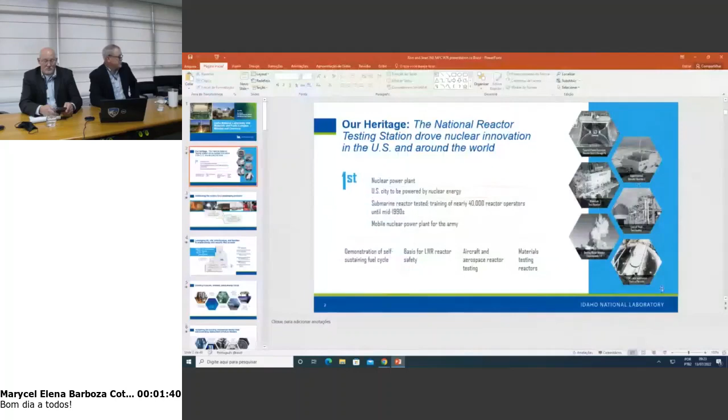Let's see if this works. Yes. All right, excellent, thank you.

Good morning, and thank you very much for having us. As the introduction, my name is Ron Cron, and this is Sean O'Kelly.

We work at the Idaho National Lab, which is the United States National Nuclear Lab. Idaho National Lab is in the Pacific Northwest region of our country, and our facilities are out in the desert. The history of the facility is that we have built 52 nuclear reactors for demonstration.

We are an applied engineering lab, so not as much theory and more actually building, construction, engineering, and experiments.

The first nuclear power plant in the world was built at the Idaho National Lab, and it powered a small town just west of our site called Arco.

It was also the home of our naval reactors training facilities and prototype reactors for many, many years.

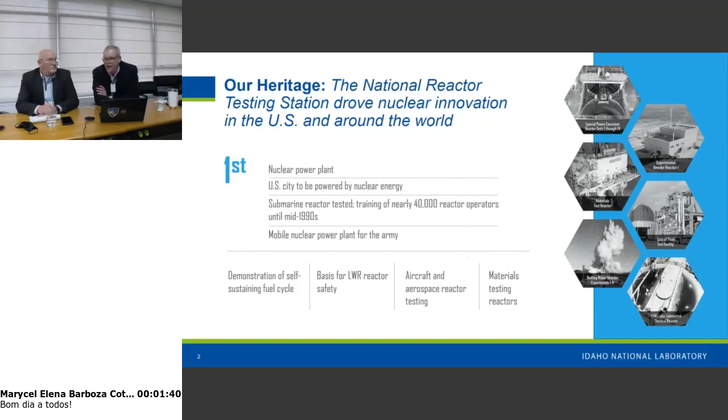Since that time, we've evolved - let me see if I can coordinate this - our mission has gone beyond nuclear, and it's more about energy delivery.

Obviously, the world is facing all types of energy and climate challenges, that nexus. We believe our lab is positioned to solve those types of problems in a leading way. Our mission is to discover, demonstrate, and secure innovative nuclear energy solutions.

So it's not just about providing the energy, but also showing how you can use nuclear energy in a different way than just hooking it up to the grid, and providing the cybersecurity such that it cannot be hacked.

All right, you jump in anytime you want. Our site is very large. You're not changing that one. Oops, thank you. I am changing this one - I'm just going the wrong direction.

Okay, let's see if we can coordinate this. We're gonna do this. We have the team up here. So our site, it's hard for me to hold still when I'm presenting. I'm usually standing, moving all around.

Our site is 890 square miles. So it provides an opportunity when you have a site that large, with 5,300 employees and 600-some vehicles in our fleet, where we can really demonstrate in a fundamental way how you may be able to do energy delivery at scale without ever leaving the boundary of the government complex.

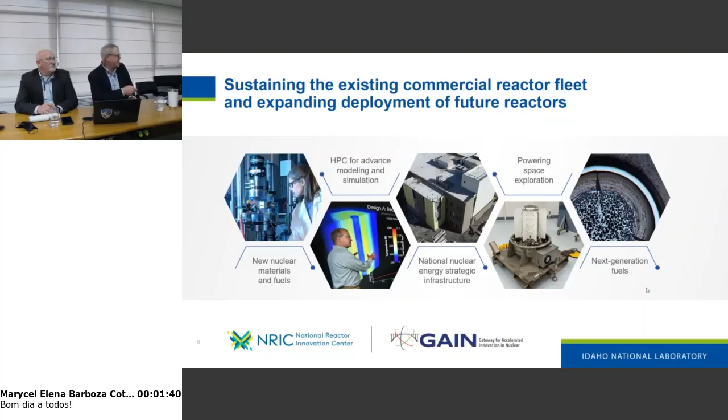And we have an idea of building new advanced test reactors. We are currently working on 3 reactors at my site right now, what we call micro reactors, 10 megawatts or less. We believe the future still includes large power plants, the 1,000 megawatt version. We also believe small modular reactors will help the United States replace the coal plants that are being retired. And we believe these micro reactors will serve places that are off the grid — our Department of Defense likes the idea of having a reactor they can transport and not have to deal with diesel generators and diesel fuel in combat situations.

So on this list, you're going to see this Marvel reactor, which we're building in our transient reactor test facility, looking at a 2024 completion date. Project Pele is the one for the Department of Defense, and as you can see, they want a reactor that can be transportable.

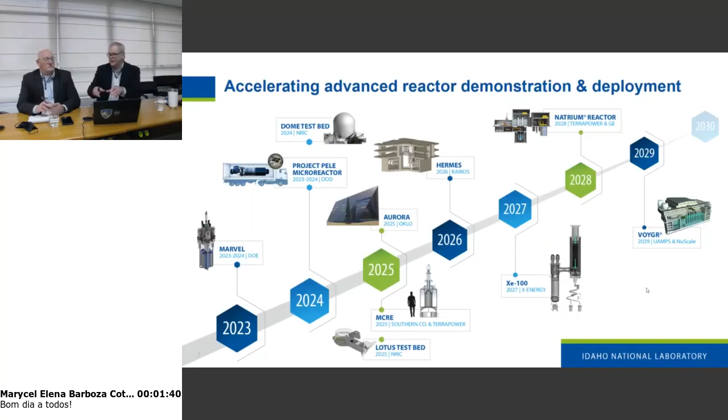Our lab director came up with this slide about 3 years ago when he wanted to challenge the country to start viewing nuclear as an absolute key option. Since that time, I believe the U.S. views nuclear energy as a key part of being able to reduce our carbon emissions. So there's a lot of interest, a lot of political support, and a lot of what we call venture capital, where people are investing in these startup companies. So our job as a government installation is to make it available so they can come out and test their reactors, ultimately to be able to commercialize those reactors and sell them on the U.S. market and the world market.

And then the last thing before I get on to my MFC slides is we want to go net zero, because we want to demonstrate it's possible to take a large landmass that's got a complicated mix of people, vehicles, buildings, and show that with nuclear and wind and solar, you can put this all together and it works on the grid.

You know, I started my career in the power industry, and managing the grid in 1986 was very easy. You had a lot of baseload plants. Gas was used for topping, for meeting demand in the mornings and the afternoons. The power factor on the grid didn't change much at all - maybe we might adjust it once an hour. And now when you have wind and solar, you're adjusting it multiple times a second. So it's just a different dynamic than it used to be.

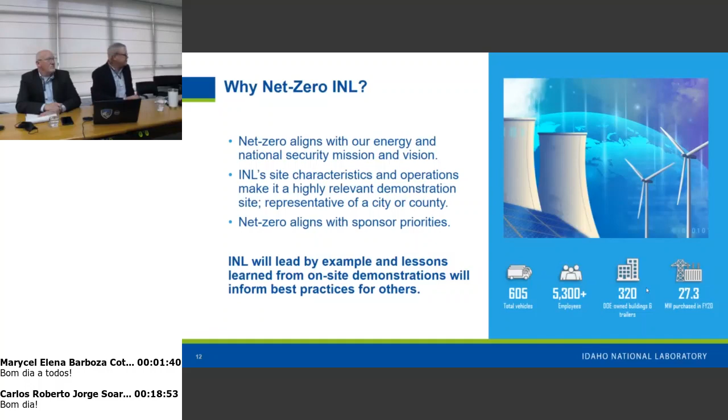Relative to the workforce of the future, this is one of the reasons we're here. This collaboration matters because we view ourselves as a national lab in the United States, but we also believe there's an international problem to be solved here. So having this collaborative agreement makes sense not just for you, but for all of us also. We want to recruit the best and brightest out of the world. So if we find a young postdoc here in Brazil and he seems eager and he thinks he can handle the cold in Idaho, then we welcome him.

So we've grown significant amounts since FY15, over about 1,800 new employees, and we certainly are recruiting all over the world now. So our facilities are world-class. Now we're recruiting, we're getting more and more people interested.

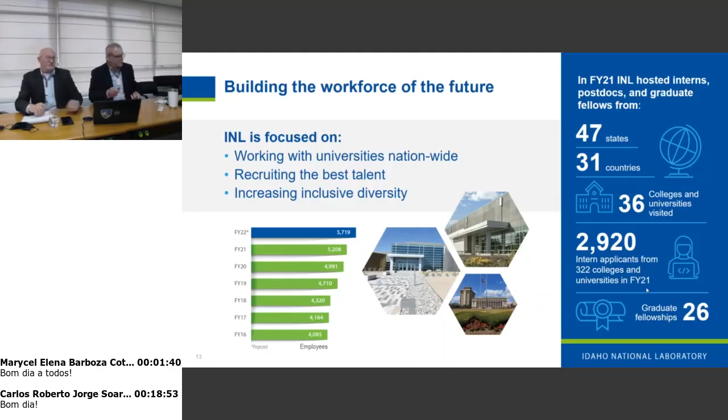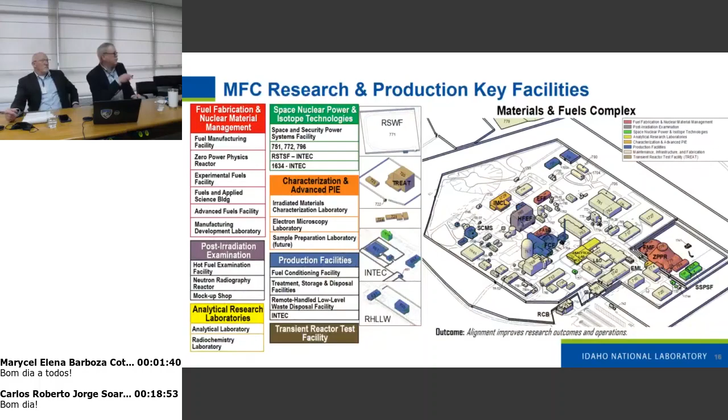These are the key facilities, pictures of the inside of all those facilities, and I won't spend too much time walking through, but basically we have state-of-the-art analytical laboratory radiochemistry capabilities.

We have multiple built facilities that can build fuel. We have a lot of nuclear materials that allow us to, if you come in and want oxide fuels or metallic fuels or silicide, whatever types of fuels you can think of, we are not trying to become a fuel manufacturer, but we do the original demo, what I call the original recipe, and then we show that the recipe can be repeated in the right quality, and then transfer that to the private industry for them to be able to make their fuels.

In our meetings here, I definitely believe there's some collaboration we can do on nuclear fuels moving forward.

This is the sample preparation lab, which is a bad name. It's really going to be a materials characterization laboratory. It is the $150 million brand new build that we're doing that has both hot cells and glove boxes and the ability to directly receive nuclear materials into this facility.

So there's a truck airlock that goes right next to the hot cells, so I'll be able to bring materials in. We're going to keep the IMCL for alpha contaminated fuels, and this will be more traditional materials testing.

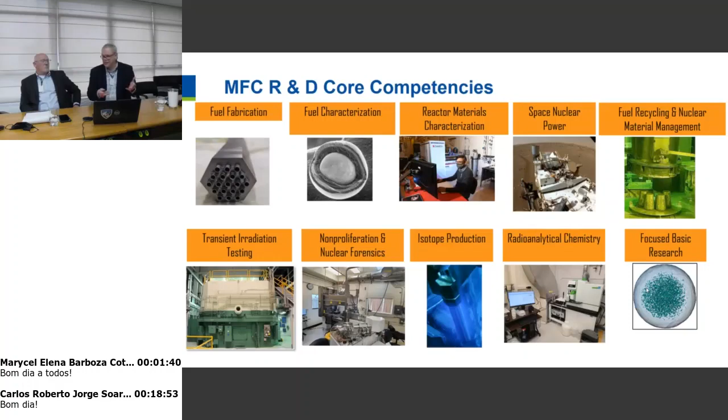These are some of our critical outcomes for next year. We want to deploy reactors. We want to continue to fabricate fuels, do our irradiation testing, and continue to support our NASA customer.

And then we have a big role at MFC in dealing with our back-end legacy items from previous work, making sure that for every reactor we look at, we're taking an approach of wanting to help the reactor builders from the time they want to pick their materials to the time they want to dispose of their waste. That's a pretty large portion of what we do.

It's not my favorite part, but it's in my organization, so I'm kind of stuck with it. But it is important that when you build advanced reactors, you have a plan for the disposition of the waste, because that affects the cost.

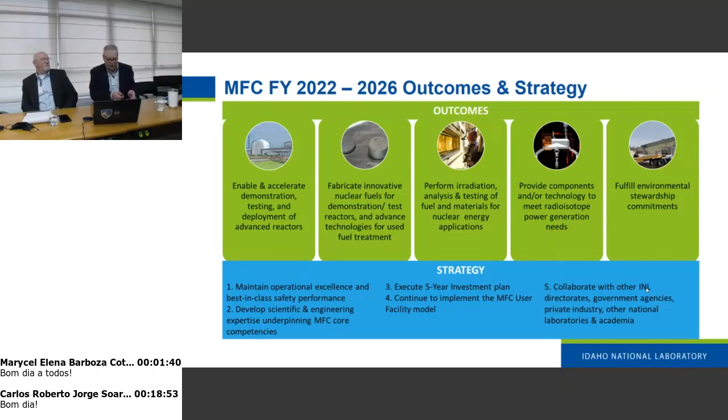MFC has about 900 people on site. We have 29 different nuclear and rad facilities and 2 reactors. And we're completely connected into all the things that the ATR is doing on irradiation and nuclear science and technology.

So the modeling and experimental connection - I generally have a rule of thumb: if we're doing an experiment, we should be modeling it; if we're doing modeling, we should be doing experiments. Those two things are incredibly important for us in the long term, because we'd like to get to the point where some of our models are so sophisticated that your licensing process can be really enabled by modeling.

But as we spoke yesterday, nothing beats an experiment that makes your model look terrible - and that's a good thing. So our models are very, very precise, but sometimes they're very inaccurate. What we're trying to do is make sure everything we're running in the model is backed up by true experimental data.

We are doing some additive manufacturing to make fuels, which is exciting, because I think we can get geometries and layer burnable poisons in the fuels. We can do things that you just cannot do with traditional methods, but there's a lot of development work to be done there. Uranium likes to catch fire when you put it in a powder form and try to put it in a traditional 3D printer. So we're trying to bring our expertise relative to handling uranium, and we've made a lot of progress there.

We are proposing to our United States government to build a new reactor fuels research laboratory. I wish I'd have proposed that 5 years ago, because I need it now. My fuel capability is maxed out. Every corner of floor space is pretty much spoken for.

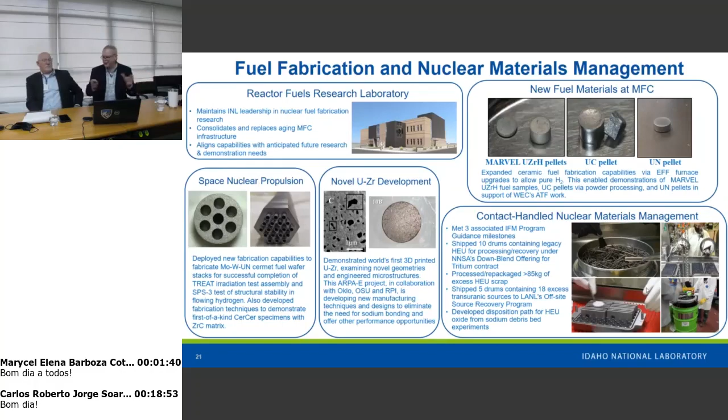Transient testing, again, this reactor is a 1957 reactor. It had not operated since 1994. The reactor was in very, very good condition. We did a restart effort and started it in 2018, and it is booked solid. This reactor allows you to go up to 17 gigawatts in a very short amount of time, and we fail fuel in it. That's the purpose of this reactor, to see how fuel is going to handle during extreme conditions. And that, we believe, is proving to be a big part of qualifying fuels for these advanced reactors.

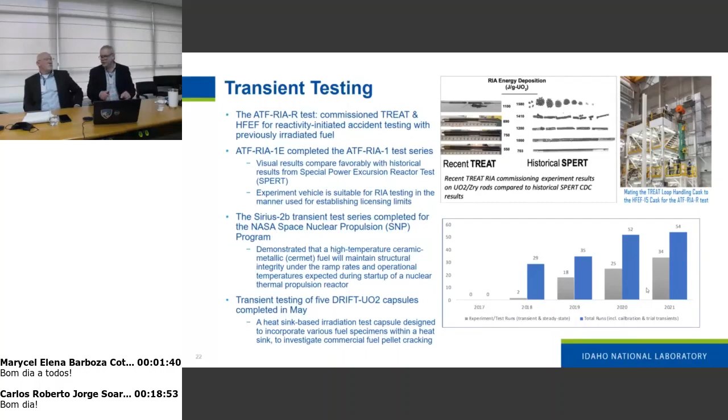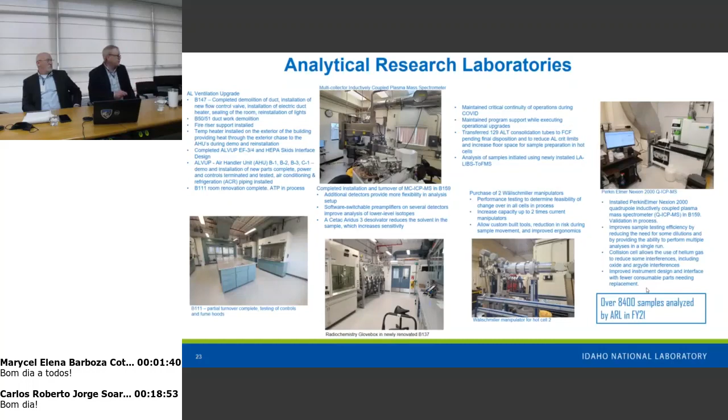The characterization and advanced PIE, we're now getting to the atomic scale and looking at some of the phenomena that, for many, many years, people knew we got these macro effects. When you did PIE, you knew we were having problems, but now we're starting to understand why, and we're learning things that, quite frankly, aren't modeled correctly. And so it informs our decisions on how to design advanced fuels, and it also breaks some old paradigms that we all thought we understood pretty clearly.

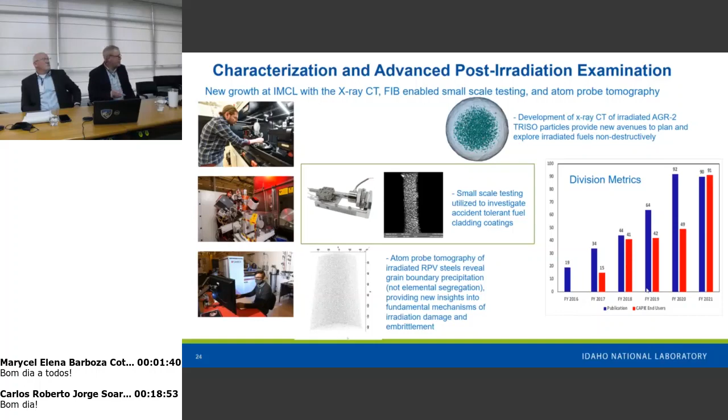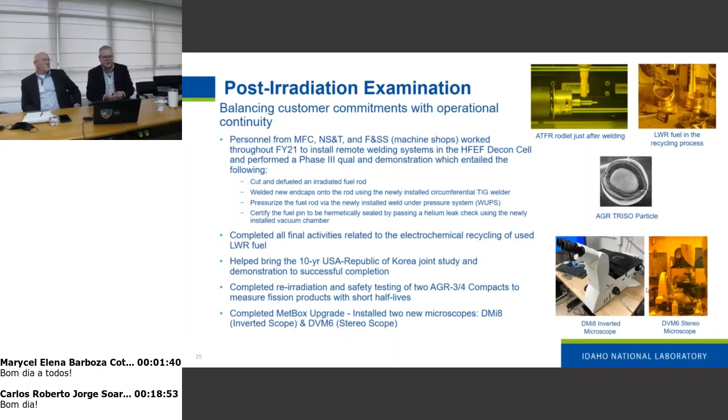Again, post-irradiation examination, HFEF is one of the biggest and most mature facilities in the world, and that allows us the opportunity to try different things. We're now to the point where we've taken some irradiated fuel, recycled it, reprocessed it, put it back into Sean's reactor, and then redone the PIE. We're seeing what's the difference between starting at ground zero with something that was unirradiated and starting with something that you're recovering the materials from, and we are seeing differences there too.

The NASA work is fun. Unfortunately, due to COVID, I was supposed to be there for the last launch, but the amount of people allowed on site kept shrinking and shrinking, and it was just a small group of people there to watch the last Mars launch, which happened in 2020.

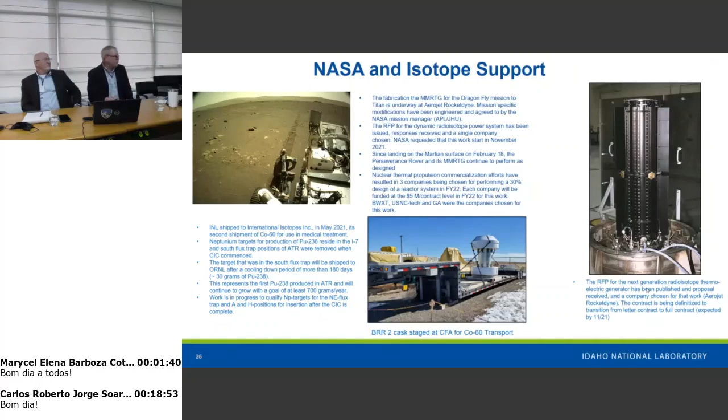And then we are making a lot of investment at MFC. In the last 7 years, with our capital construction projects, we've probably invested about $200 million at MFC. After we finish SPL, we move on to the test beds, and we have plans to invest about 500 million more over the next 5 years. So it's a very ambitious build out, but again, the U.S. sees nuclear as very important.

And this is the material management. We have built a repository out near Sean's facility, just upwind of Sean. We built a place for some of our remote handled low-level waste. And then we are doing R&D in this area to figure out how to reduce the cost of handling some of these materials. And that's, I think there's probably... I don't see it up here.

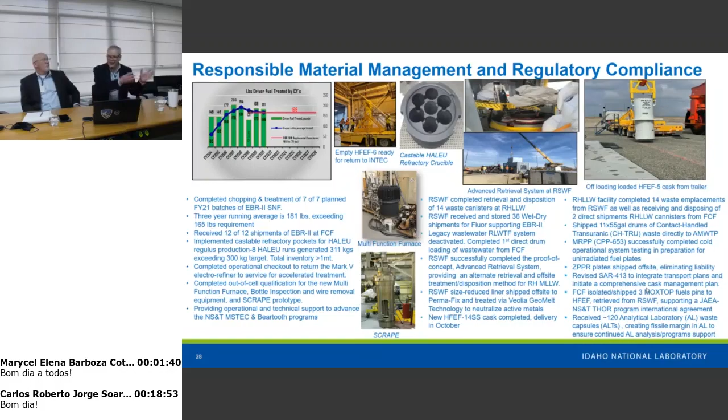Maybe that got edited out. I'm not sure what I can share, but we've had a couple innovative things that are really helping us move away from the traditional break it down, package it, bury it in the ground approach.

Obviously with a facility complex this large, being able to do maintenance, maintain that infrastructure, and fabricate things for these advanced reactors is important. This is a mock-up of the Marvel reactor. We're going to run this with an electric heater before we actually build the final product, which will have the nuclear heat source.

And with that, we continue the balance of executing our investments, improving how we do business. We think it's important, delivering our mission outcomes. We've got a lot of projects, and then dealing with our waste.

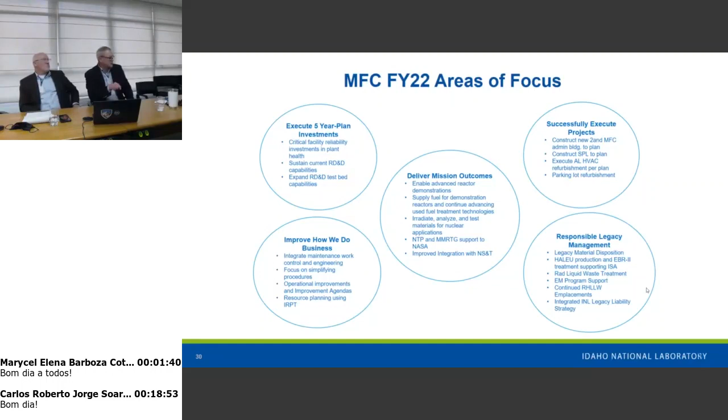And now I'm going to turn it over to Sean, who hopefully will sound better than me. Ron's a little congested today. I feel great. I don't know what the air here in Sao Paulo is doing to my throat, but it's not good.

So we're going to talk about the Advanced Test Reactor. It's a 250 megawatt thermal reactor, the largest, highest power test reactor in the world operating today. What we have here is a picture of inside the reactor vessel during a recent overhaul over the last year. We went in and replaced everything within the reactor that would be called a reactor core component. We call this the core internal changeout. We have to do this about every 10 to 15 years because the high neutron and gamma fluxes inside the test reactor, as we're testing materials, are also damaging our own reactor.

Because of that, the reactor has had to go through 6 of these overhauls in its lifetime of now 55 years. What we see here is one of our technicians inspecting an in-pile tube, a stainless steel tube that we use for simulating the conditions of a nuclear power plant pressurized water reactor of 3,000 megawatts.

The Advanced Test Reactor and that complex we used to call the test reactor area has been around since pretty much the beginning of nuclear power development in the United States. The first reactor that started up, of the 52 at the Idaho National Lab, was the Experimental Breeder Reactor Number 1. But almost within a year, the S1W Nautilus submarine prototype was started up, and down the road here at the test reactor area, the Materials Testing Reactor was started up to begin testing materials for the Navy and for nuclear power energy development.

Someone in the Navy test program has told me many times, once you start up a reactor of any kind, you immediately have to start developing a test plan to test the fuels and materials, because these test reactors are time machines that accelerate the damage seen during a normal lifetime. So you can test fuels in an environment prototypic of actual use, but with accelerated burnup you can see those results 10 years or even more before they'd appear in an advanced plant.

Here, the Advanced Test Reactor—the small picture on the left-hand side shows when we had 3 of our test reactors running in 1970: the Materials Testing Reactor at 40 megawatts, the Engineering Test Reactor in the middle of the picture at 175 megawatts, and the Advanced Test Reactor, off by itself, at 250 megawatts, also running at full power at that time.

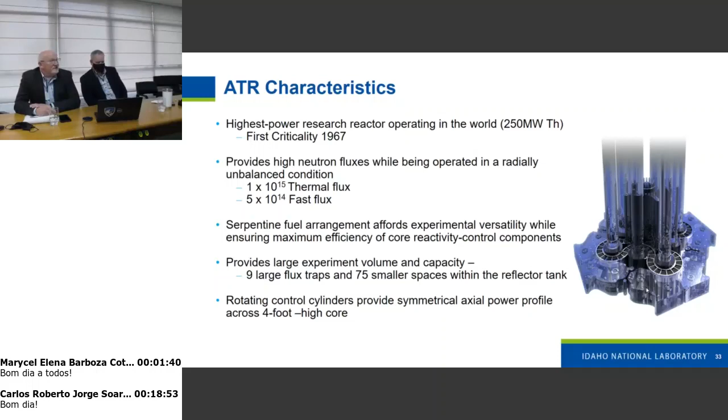It's been operating 55 years this month. High neutron fluxes, 1 times 10 to the 15th thermal flux, which is one of the highest flux reactors, comparable to the High Flux Isotope Reactor, which is 2.5 times 10 to the 15th. But the fuel arrangement and the unique design really make the Advanced Test Reactor so unique in the world of test reactor development. It is specifically built to test nuclear materials and fuels for nuclear power development and the United States Navy.

Specifications here, you can see the reactor vessel. It is a solid stainless steel vessel, the only type of vessel in the world not clad with stainless steel or other materials—it is solid stainless steel. That reduces the likelihood of embrittlement from irradiation. It's designed to have a long lifetime, and our current estimates, based on damage and the current fluence rate on the reactor vessel, suggest we could probably run for another 300 years without having to change that reactor vessel.

It is 12 feet in diameter, 36 feet high. You can see the characteristics here at the bottom of this slide. It runs at 71 degrees Celsius maximum outlet, so it's basically a hot water heater—it doesn't run at high temperatures, and it doesn't boil the water. It is pressurized to 390 pounds, 2.7 megapascals, so it's slightly pressurized.

So how do you simulate the environment of a nuclear power plant pressurized water reactor in this sort of setting? We have the in-pile tubes, those stainless steel tubes I showed you before in the photograph. Inside those tubes there's a flow tube, a single tube with a center tube that goes up with flow and an outer envelope that goes down. We raise the pressure to 2,500 to 3,000 pounds and high temperatures, 500 to 600 degrees Fahrenheit, exactly as you would see in a pressurized water reactor, including the chemistry.

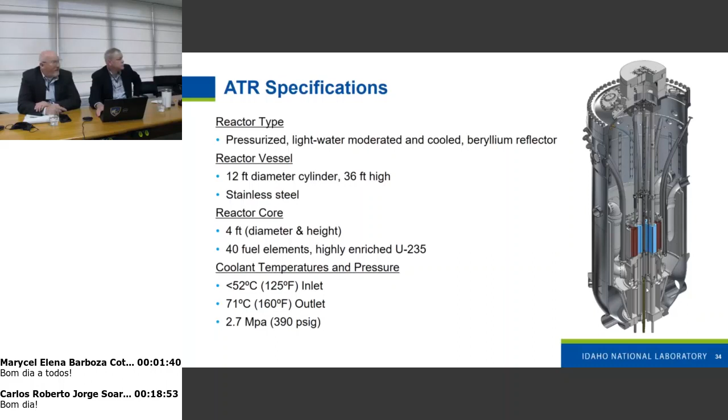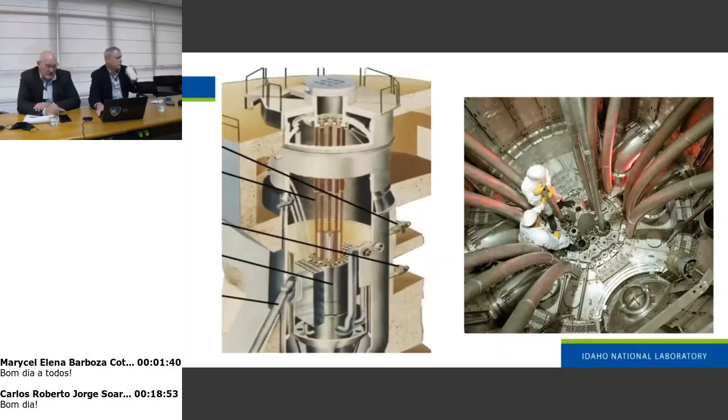So very quickly, I'd like to explain why the advanced test reactor is considered so advanced - advanced in 1967 when we started up, and still considered the most advanced test reactor operating today. You see the yellow in this diagram on the left - those are the curved fuel plates, the fuel elements, which are 1.2 meters tall with 19 fuel plates. It's a highly enriched uranium fuel system, very similar to your 5 megawatt reactor in terms of the fabrication, powdered and rolled materials. But it is highly enriched uranium because of the high power density.

We have not been able to convert it to low enriched uranium at this time. But the serpentine fuel, this four-leaf clover shape, wraps the fuel around the experiment locations in orange, creating these very high neutron flux density flux traps. This is where the key experiments for power reactors, the U.S. Navy, and U.S. fuels development are located.

The purple circles you see are embedded positions and holes inside the beryllium reflector. Beryllium surrounds our advanced test reactor, which is how we operate at the powers we do. So we have 77 positions available. The advanced test reactor is so utilized at this point for testing materials and some cobalt-60 isotope production that 90% of our key locations are scheduled for the next 5 years, with many of these positions also scheduled for an additional 5 years - so 10 years out.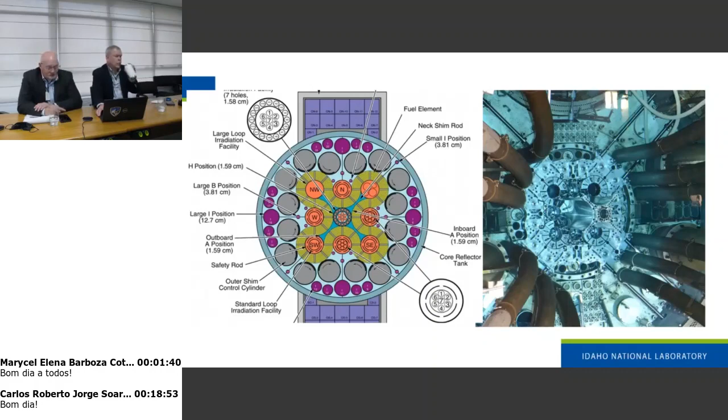That allows the entire 1.2 meters of height to be available for irradiations from the minute the reactor is at power. Unlike many other reactors in the world, the effective height of the advanced test reactor is always 1.2 meters of available neutron irradiation space.

Due to the size of the reactor, and because the facility is all out by itself, we also maintain potable water systems and other systems. We are effectively a city of 500 people out in the desert.

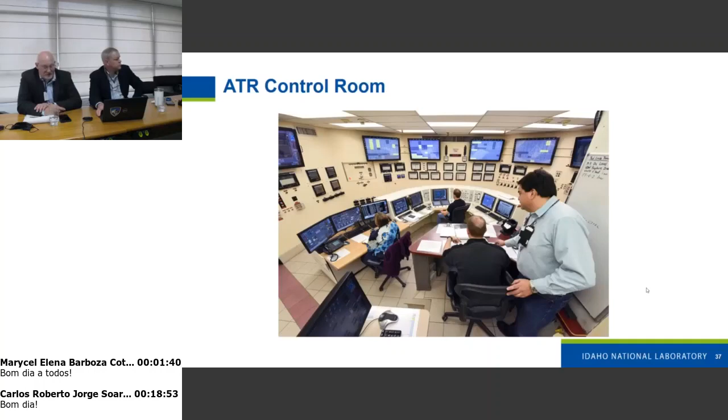The overhaul that we just completed was highly complex—the most complex overhaul that the Advanced Test Reactor has undergone in its 55 years, with the exception perhaps of initial construction. We performed significant work on the reactor, including significant life extension and age management work outside of the reactor core itself.

The U.S. Navy and the Department of Energy have determined that the irradiation capabilities the Advanced Test Reactor currently provides are necessary for the next 60 years. They have already told us this thermal irradiation capability must be available to the United States until 2085. That would make the Advanced Test Reactor a 120-year-old reactor. So we are looking at options to perhaps replace these capabilities in the next decade or two. But for sure, the Advanced Test Reactor is not going anywhere for at least another 20 years.

These are a few pictures from the overhaul. To actually access the core the way we needed to for this overhaul, we have to take off the lid of the reactor—this reactor vessel head, which weighs 30 metric tons of stainless steel. That head is removed and placed on a stand off to the side, off the top of the reactor. This is how we access the reactor.

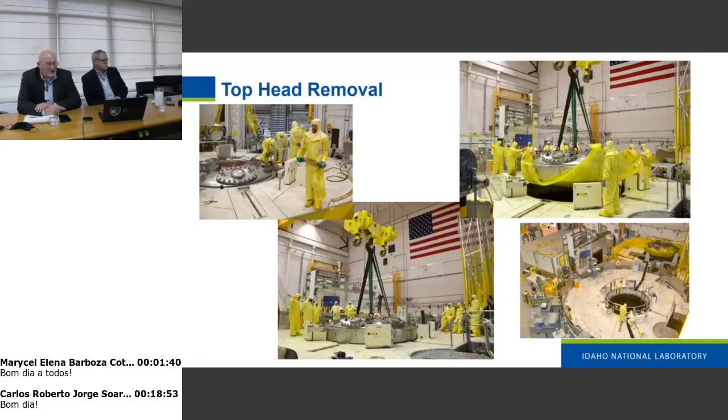There are 3 phases: we take the lid off, then take all the internals out of the reactor—highly radioactive materials. Some of those materials have to be transferred through air, so we completely empty the building when we do those transfers, obviously. Then we put the lid back on and put the reactor back together with new components. We are very proud of that successful completion.

We took tours of your facilities.

We also have some experience upgrading our second reactor in the building. We have 2 reactors, as does Ron. We have the Advanced Test Reactor at 250 megawatts and a critical facility that we use for testing experiments and materials prior to going into the big reactor—it only operates at 1,000 watts. But it is identical in size, shape, and configuration to the Advanced Test Reactor; it just doesn't have to be force-cooled because of its lower power.

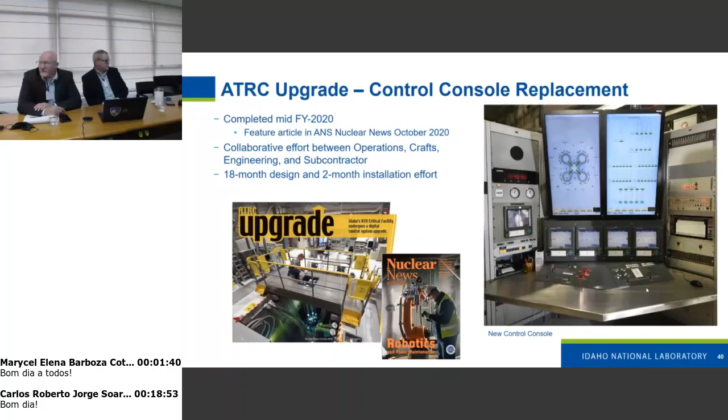You see here in these pictures that we performed a significant digital upgrade to the reactor console for the Advanced Test Reactor Critical facility, ATRC. About 3 years ago we completed that project, and we're continuing to upgrade some portions of the ATRC console—a significant improvement. So we've already discussed sharing some of our experiences, and perhaps having some of your staff come visit to see what we've done with the Advanced Test Reactor upgrades.

I mentioned our customers—obviously the United States Navy's nuclear propulsion program for aircraft carriers and submarines is a very important program. We are developing fuels and materials for the next generation of submarines; that work is going on right now. But it's important to point out that 50% of our work is just to support the current ships in the fleet—ships that have been operating for 25, 30 years still need nuclear materials testing.

I think this is an important point for both Ron and I to make: as long as you have operating nuclear facilities, you need the ability to test those materials in an environment similar to that condition, as well as being able to perform some level of post-irradiation examination. This is part of our support not only for the current operating fleet of reactors—the U.S. submarine fleet—but also for the advanced reactors coming online as small modular reactors in the future.

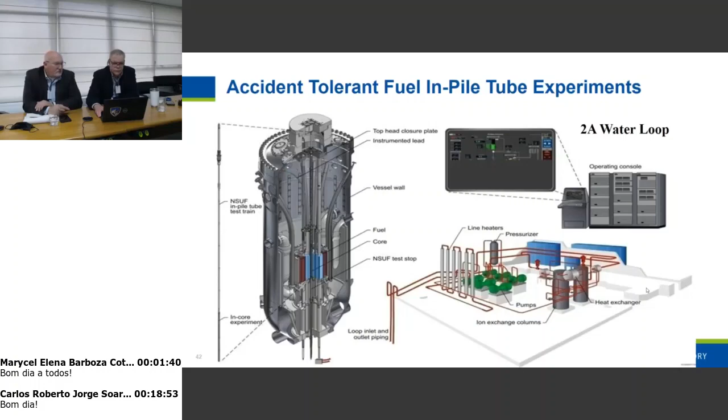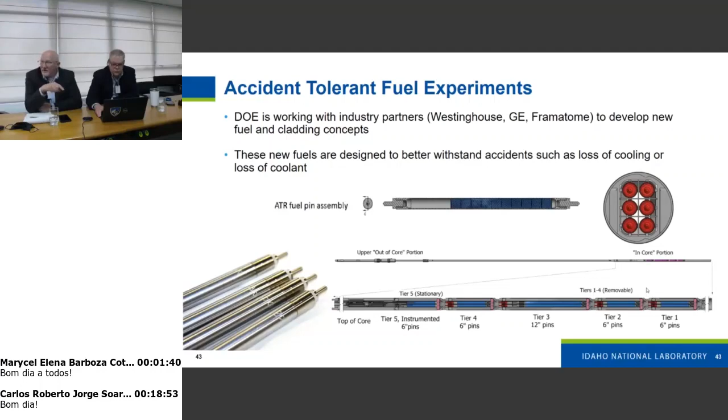Just a typical sort of capsule. Again, advanced test reactor, this experiment test at the bottom of the slide here is 5 tiers of different materials and samples to be tested. And all 5 tiers are available because of the design of the advanced test reactor. We don't have to adjust for neutron flux densities as the reactor operates. The entire volume is available for testing as soon as we start up.

And I mentioned that we use pressurized water systems. We can simulate that. In this case, we had to simulate the conditions of a high temperature gas reactor that is a fast reactor. So we simulated that condition by flowing helium gas through these particles, these samples, to simulate helium gas coolant.

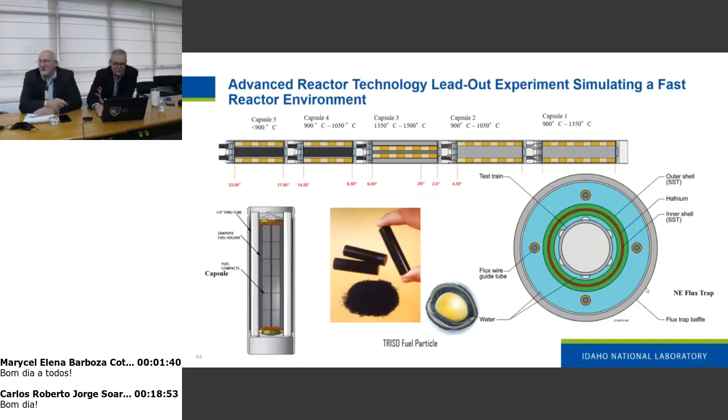We also had a ring of hafnium as a neutron shield, a neutron filter, to remove the thermal neutrons from the test. So the fuel particles, as far as they were considered, were in the environment of a fast, high temperature reactor, and that's how we qualified the TRISO fuel system. So we can also do other coolants.

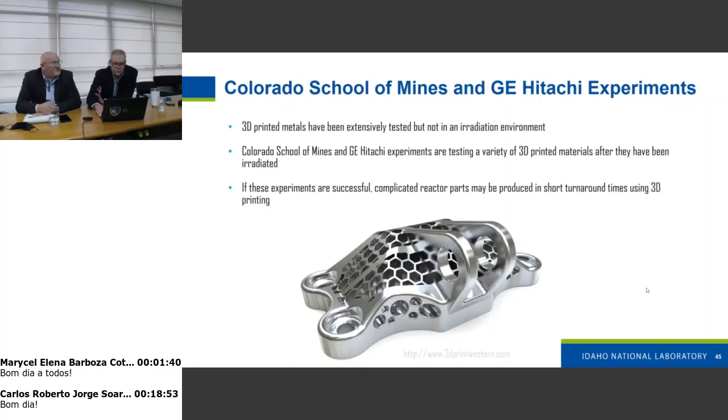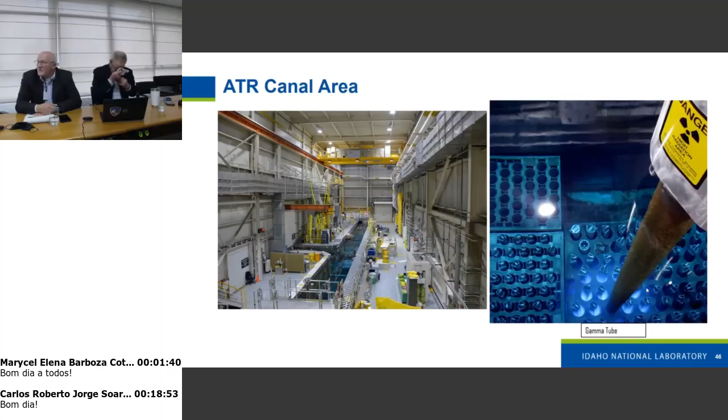We've done cameras and borescopes for very high radiation environments for cameras, as well as performing some experiments with some of these advanced reactor coolants, such as molten salt or liquid metal for radiolysis. And that is all I've got on the advanced test reactor. Thank you very much for your time.

We thank you for this great presentation. It's remarkable infrastructure and so on.